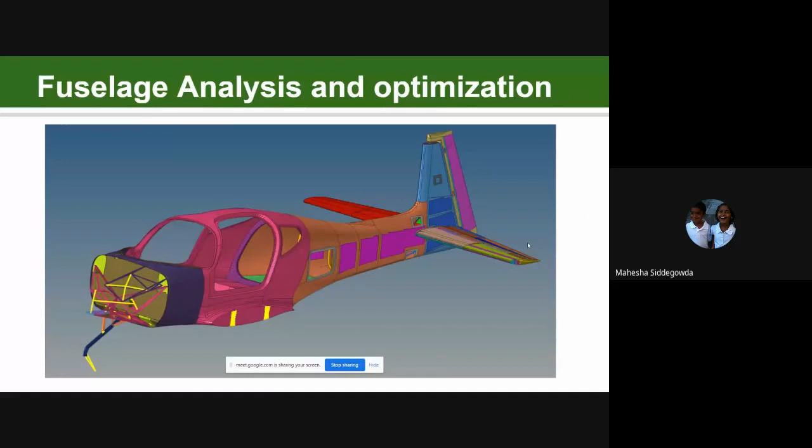Okay, fine, so I'll quickly show. This was the old aircraft I was talking about, and this is the new aircraft. This is not a vertical takeoff and landing, this is a fixed wing regular aircraft. This design is the vertical takeoff and landing aircraft. I was responsible mainly for the wing and the landing gears for this project, structural analysis, and supporting them with weight optimization.

So this is the actual prototype that we built, and we did the testing. I was also responsible for the electric motors. This is an electric aircraft, by the way.

There is a unique advantage of electric vehicles when you want to take off vertically and land, because your motor also works as a control surface. So you don't need a new control surface, you can use the motors itself for maneuvering. So this is the design for the electric aircraft, with the electric motor embedded in the propeller itself.

So this flew successfully in early 2015, and we did a lot of engineering work for this. This was probably the first electric aircraft that took off vertically, landed, and did all the testing successfully. This was done in California, Bay Area.

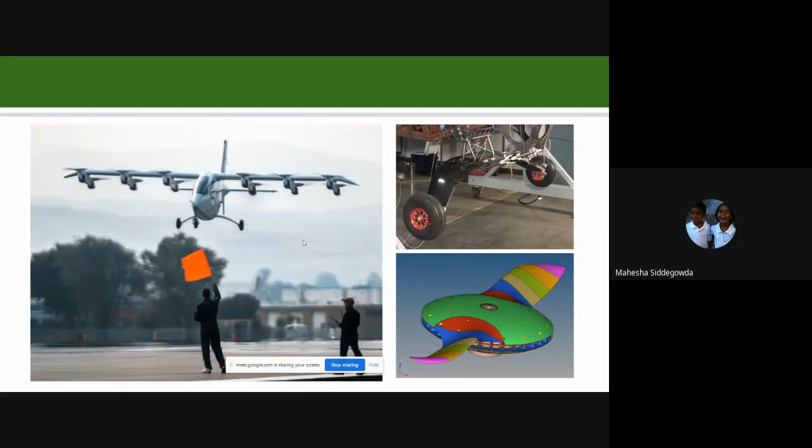This is the actual aircraft that was finally built and test flown. So you can see it flying. This is the main landing gear, and this is the test setup. I have a couple of pictures of this.

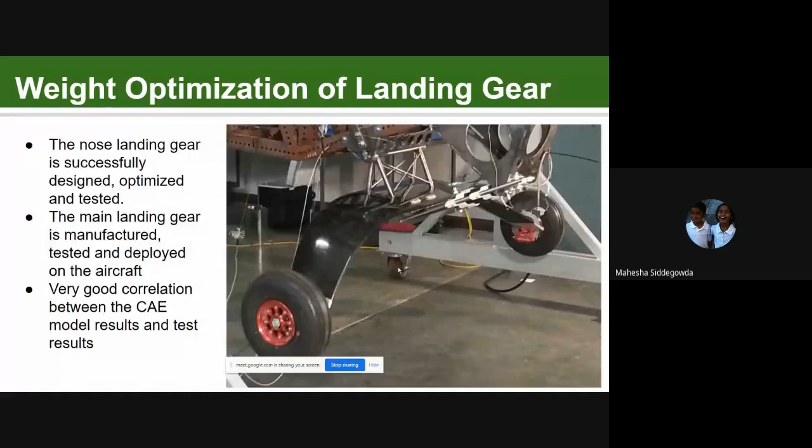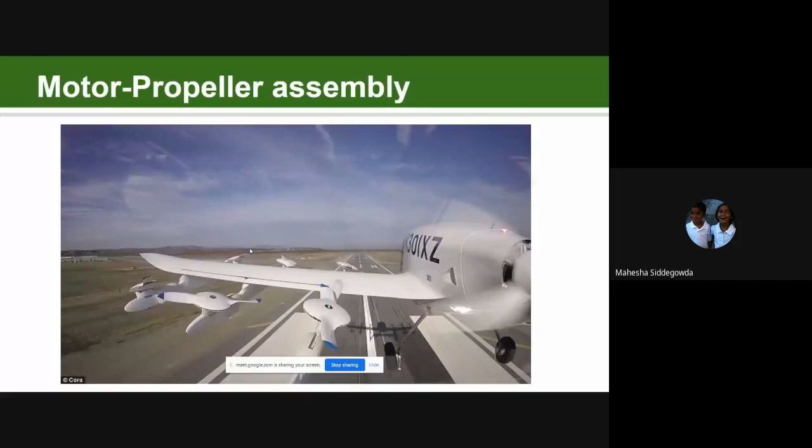This is the front nose landing gear. Again, everything was optimized, and this is the wing design. This is another view of the wing.

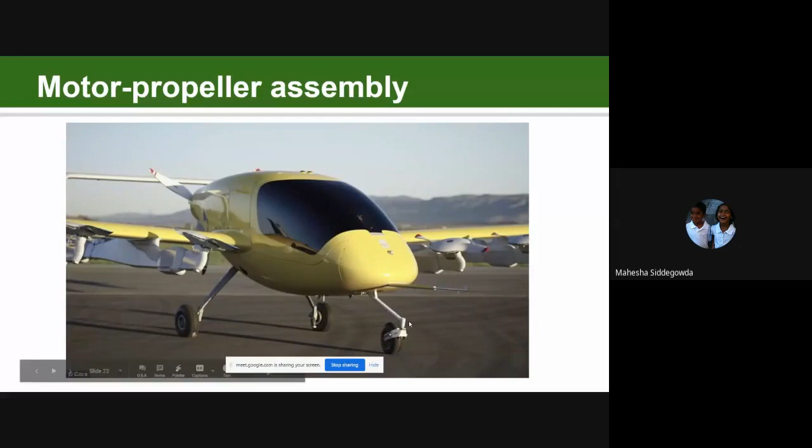This is the second generation aircraft, the same aircraft, but with some design changes. So you can see the propeller embedded, electric motor embedded propellers here. This is the CAD model for that, and this is how it looks inside.

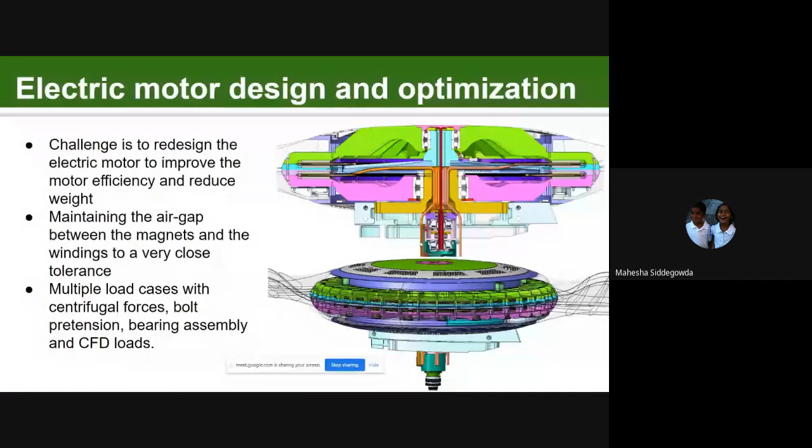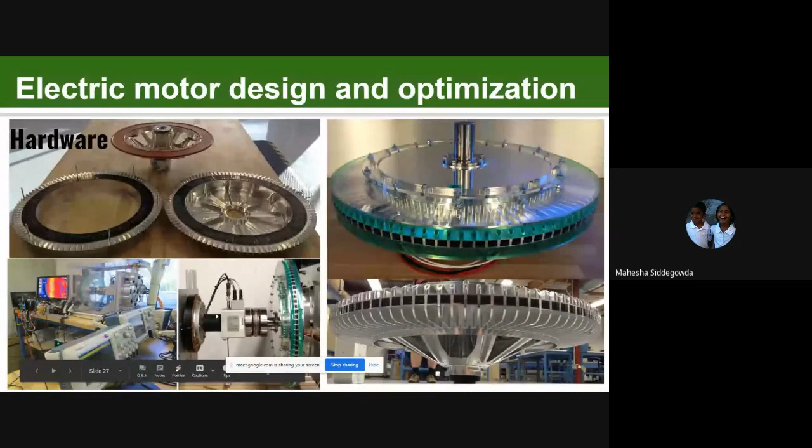This is an electric motor with the whole assembly. And then this is the actual motor that was built, and we also tested that. In the lab, it was tested to make sure the performance and weight and all other aspects are met.

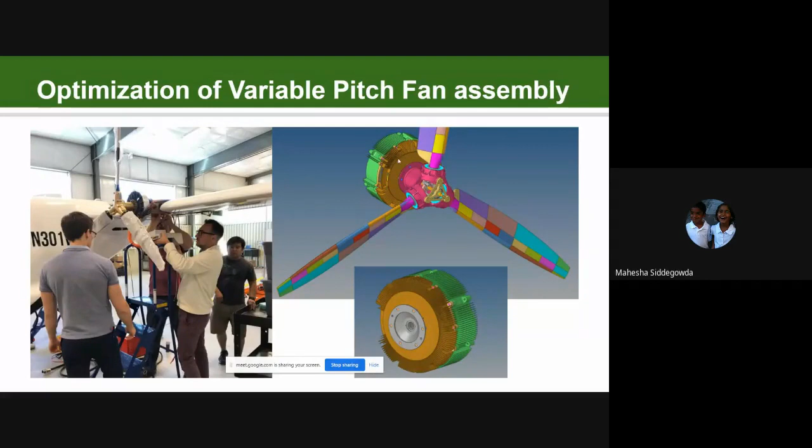So that was one of the projects, and this is another project where I worked on. In this, I'm showing the propeller, which has a variable pitch propeller, again with an electric motor in the back. And we also did the testing of the propellers at the test lab.

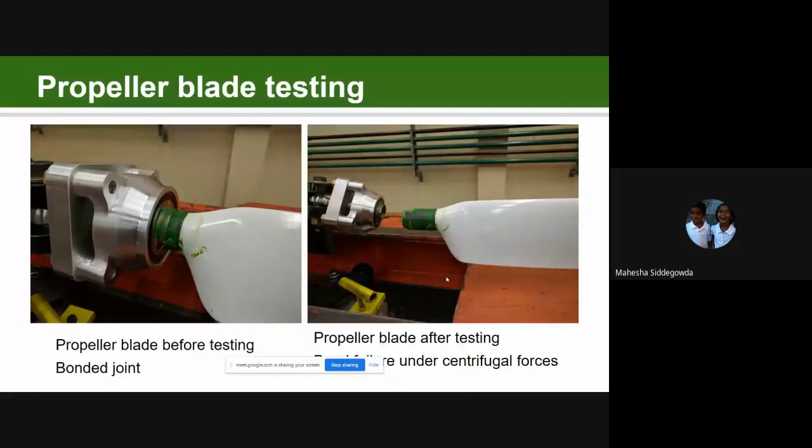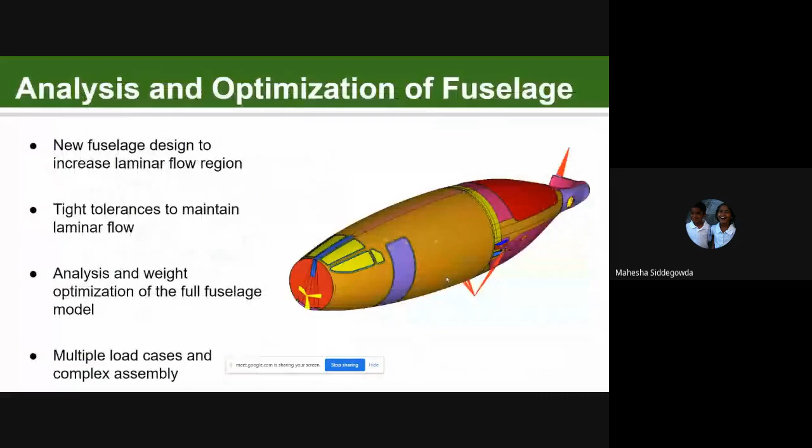So in 2012, I was a consultant for Adidas. We designed a new shoe sole for sprinters, 100-meter and 200-meter sprinters. This was worn by all the Adidas sponsored sprinters.

Unfortunately, Usain Bolt is really fast. It doesn't matter which shoe he wears, he won the race because he's a miracle runner. He was wearing Puma, but our guys also did pretty well in the race. I think they came third. One of the guys came third in this.

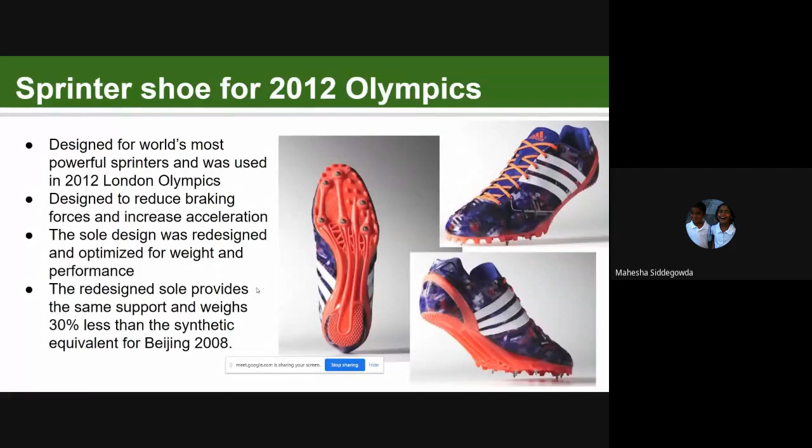Again, there was a lot of engineering work that went behind this sole design. What you see is like a pattern, but it's not a pattern that somebody sketched. There is a lot of engineering work behind all this design and the structure. What I'm trying to show is how we can use engineering and actually make a huge difference in real life.

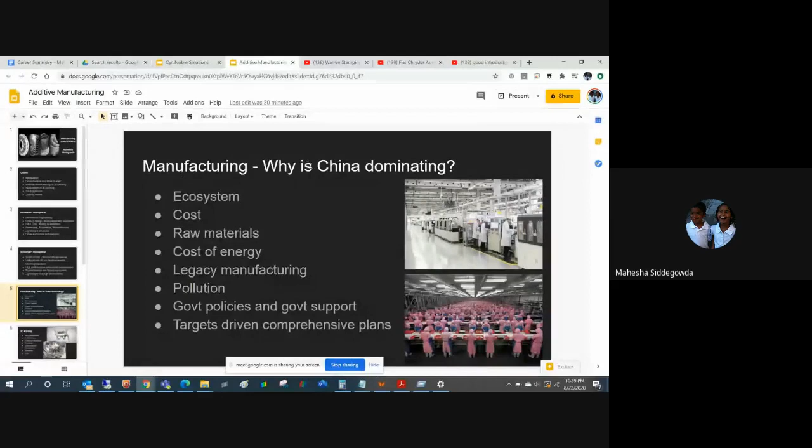I'm back to my main presentation today. COVID has created this opportunity for countries and companies to think about where they are sourcing their products, how they are manufacturing, and what they can do going forward. Especially in the US, there is a big push to bring manufacturing back to America, because right now maybe 70-80% of manufacturing is done outside, and much of this is coming from China.

First, let's understand why China is dominating, and we can then compare where they have advantage, where they can change, how this can be shifted out of China for various reasons. There is no politics in this, I don't believe in that, but there are reasons why it has to be shifted out, which would naturally happen.

One is the biggest, even though we think China manufacturing is cheap, it is not cheap for no reason. It's not like somebody is taking a loss. They are making a profit too. It is cheap because they have set up a huge manufacturing ecosystem.

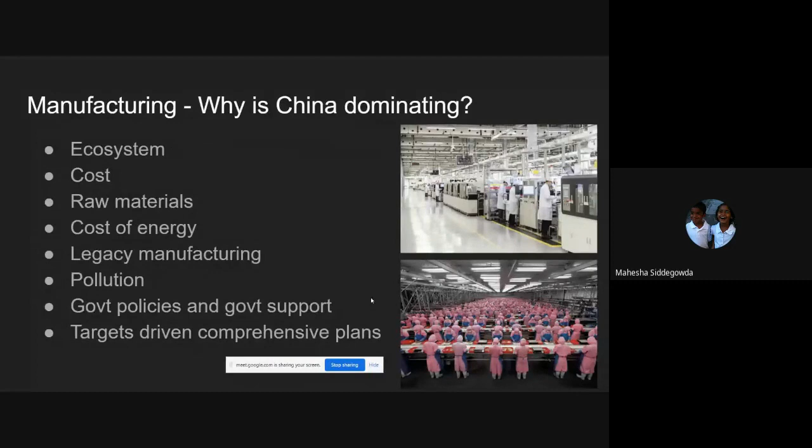So for most parts, you can change the game by just adapting to a new technology. This is where a lot of opportunity exists - to not copy what China is doing, not copy how much money they've invested and trash the whole ecology, but to be smart and leap forward to adapt a new technology. You can negate all the negatives in an existing system and start with a new, cleaner, less expensive technology which gives you an advantage.

So what this does is it takes a powder. I'm only focusing on metallic, but there's plastic, ceramics, and you name it. Everything nowadays is thought of as 'how can I 3D print this?' But I will only talk about automotive and aerospace related applications, since that's the field I work in.

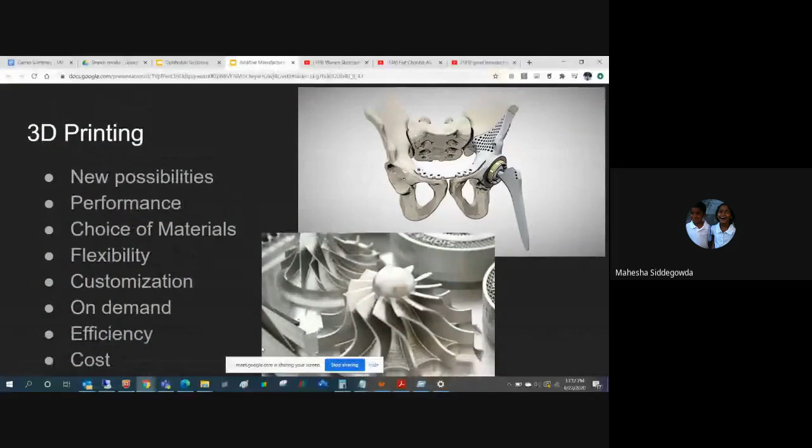And it also provides flexibility of manufacturing. For example, let me show you - I have one video. One second, I think I have to exit here. Okay, are you able to see the video I'm playing?

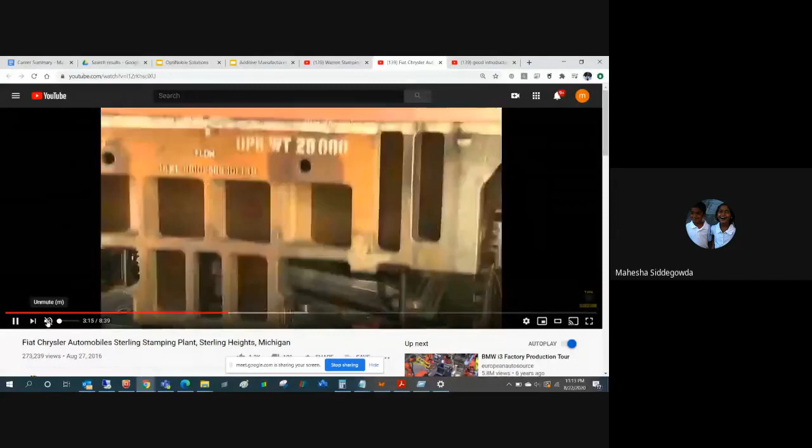Yes sir, it's visible. Okay, so what I'm showing you is a stamping unit for stamping a car side panel.

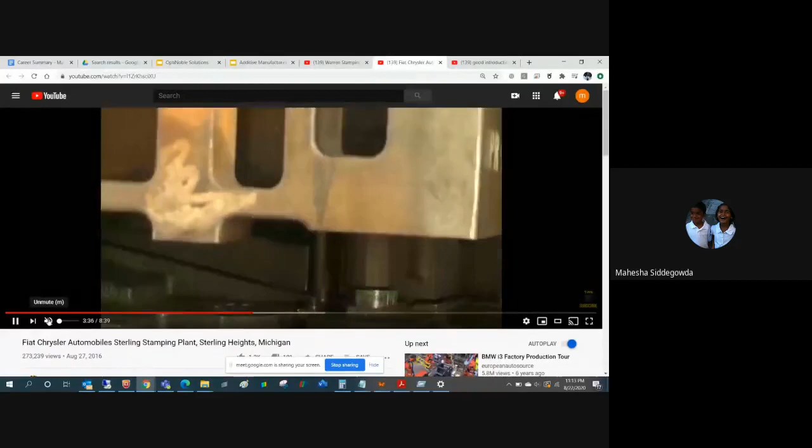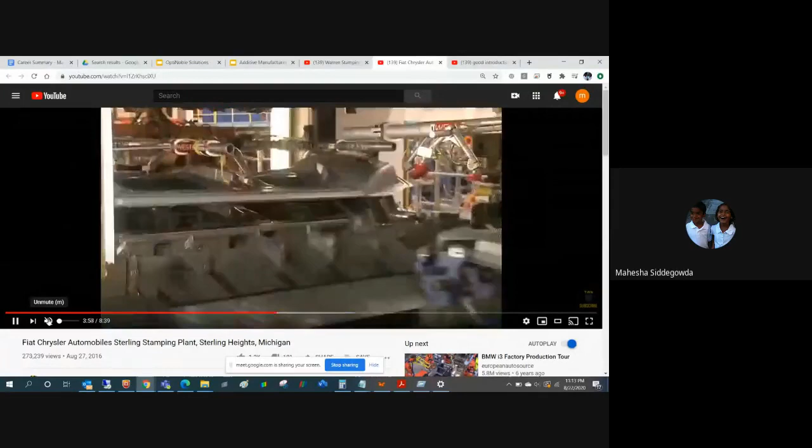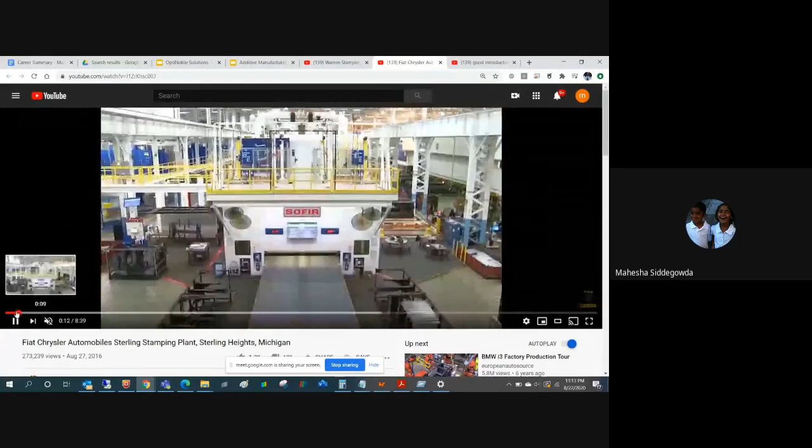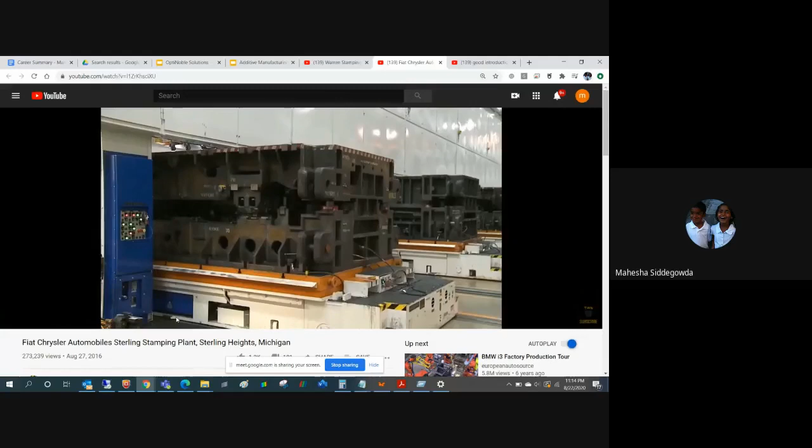So you can see this progressively getting stamped in a die, then it gets trimmed and so on. It goes through several stations before one car side panel is ready. For that to happen, let me show you - this is the kind of huge factory that you need. You can imagine the size of the factory and the toolings. This is just for one part I'm showing you, but there are hundreds of such parts required for a car body panel.

So you can see all these progressive stations - it gets stamped in one station, then goes to the second station, third, fourth, and so on. You can imagine how much money goes into building this factory, how much money you have to spend on building these tools - millions and millions of dollars.

But if the car didn't succeed, if people didn't like it, they have to discontinue it. All the investment made to build these huge dies, all the millions of dollars spent on building the tool itself, is all gone to waste. There's a huge loss associated with it. Not only that, just to have one car prototype built, you need to spend months or years on tooling before you can produce a part.

And if the part doesn't come out well, if it has problems with it, quality issues, folding, tearing off and whatnot, then you have to go back and redo your tooling and readjust and so on. So this puts you not only at a very big investment disadvantage, it's also time that you have to invest.

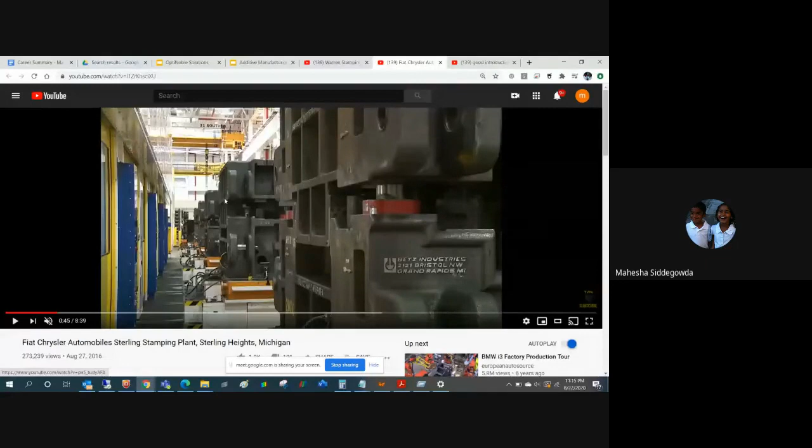You have to plan ahead, maybe years in advance. Car projects typically take 4 years, from concept to actually releasing it's a 4-year cycle. Some companies have shrunk it to maybe 3 or 2.5, but still it's a lot of time, a lot of money spent. And you can imagine just for one part how much effort or resources go in.

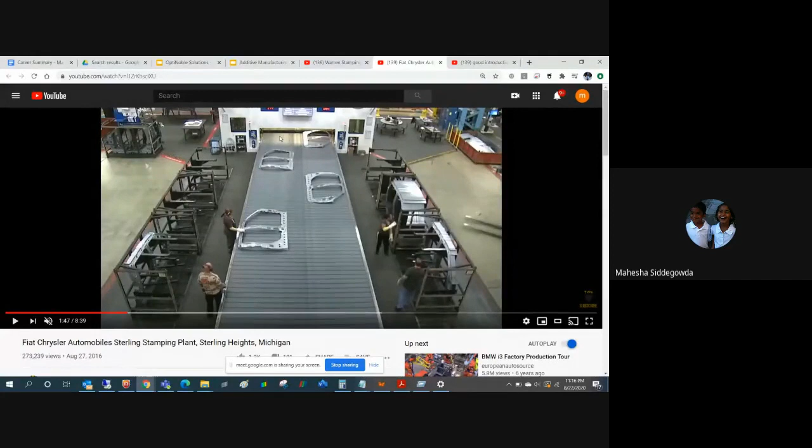So what I'm trying to show is only companies which can invest in this kind of infrastructure can do this job. But as you saw, this facility is only meant for building car panels. It cannot produce anything else. If you want to produce something else tomorrow, you have to tear down everything, retool, and invest a lot of time, money, tooling, and so on. So typically no company does that. They keep producing the same panels over and over again. You can almost think of it like a rigid infrastructure which can only do what it is supposed to do.

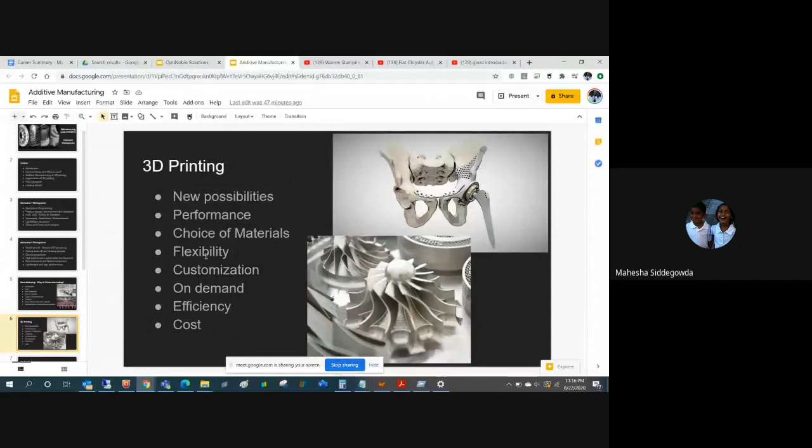But in case of additive manufacturing, what happens is you have this flexibility. You can just print one part, you can print 10 parts. You can change in between. It's basically like printing. You have a printer at home, you can pretty much print whatever you want, it will print on a sheet of paper. It's exactly like this. Whatever command you give to print, it will print. So that flexibility is there.

During COVID, a lot of companies which were involved in 3D printing, all of a sudden their regular production was not required because people were not going out, businesses had shut down and so on. But medical equipment became a huge demand. So all of them just stopped whatever they were printing or producing, and shifted to whatever was the emergency production. This kind of flexibility inherently comes with this technology now.

And you can also customize what you want. For example, if you're printing any biomedical implant, everything can be customized for you as a patient, and it can be very unique in design, structure, weight, and so on. This is a huge advantage when you have to produce one-off products, which you cannot even think of in other kinds of manufacturing setups. And you can change your response based on demand.

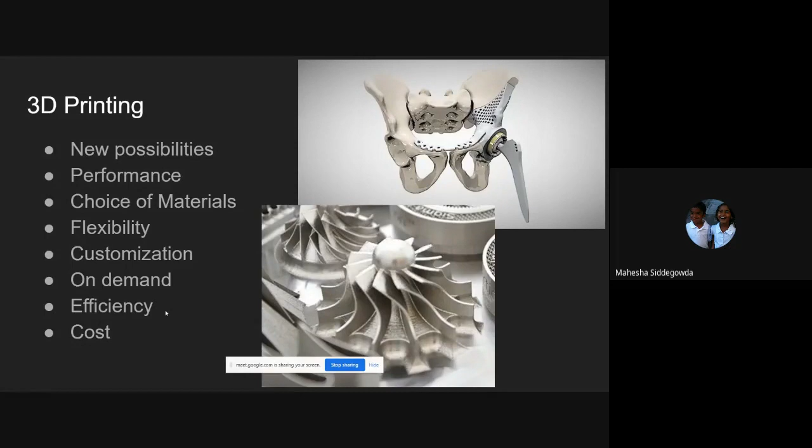There is also a lot of efficiency and cost advantage that 3D printing provides compared to a traditional manufacturing setup. As I said, the key advantage is you completely eliminate tooling cost, and you eliminate the time required to first make the tools, then tryouts, then rectifying all the errors you get in your product, reworking the tooling, and so on. All that is completely eliminated, and you don't need huge infrastructure, huge plants, huge machineries, trained skilled manpower, and so on. You also don't really need any ecosystem.

So typically, when I say ecosystem, even though there is one company that manufactures a final product, it was cast in some other factory, machined in some other factory, post-processed in some other factory, and then maybe given a final shape in some other factory, and so on. So it goes through so many different factories or systems that can all be completely eliminated with a 3D printed part.

Right now the cost is quite high, but it's coming down very fast, and it will become competitive in coming years. This is guaranteed. Right now the cost key drivers for adopting this technology are the cost of the machine itself, and then the material cost, which is the powder cost, and simply the cost of adaptation is quite high.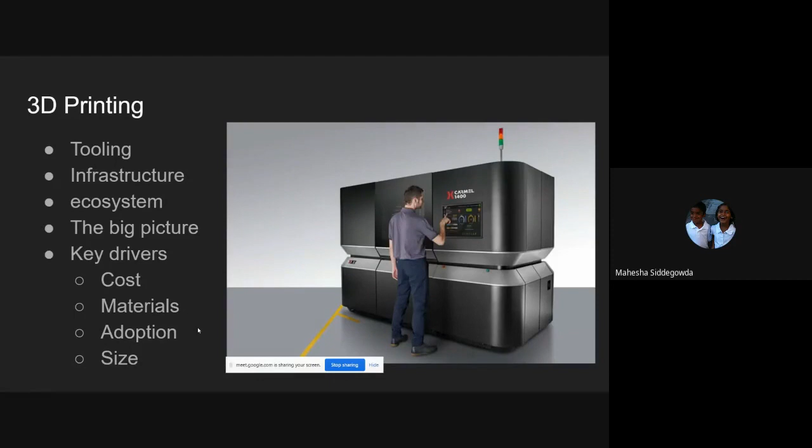So what are the applications? Why in the context of China did I mention this? The reason I'm mentioning 3D printing as a new manufacturing opportunity is we don't need to have such a huge infrastructure, huge ecosystem, factories, and so on. This can be turned around, and a small printer in a small shop can actually do the same job that the big factory is doing, and that's where the opportunity lies.

So we can bring some of this manufacturing back, say to US or to India, or whichever country is considering it, and they can start with this, and they don't have to go for the old big factory type of technology, but they can go with this nimble 3D printing, and first look at what are the parts they can produce with this 3D printing. So that's an opportunity for countries now.

What are the typical applications, the low hanging fruit so to speak, for 3D printing? One is definitely product development and validation. As I mentioned, when we build new products, there is a lot of trial, a lot of iterative design, back and forth, testing and validation, and new design iteration that has to happen. All that can be very efficiently executed with 3D printed parts.

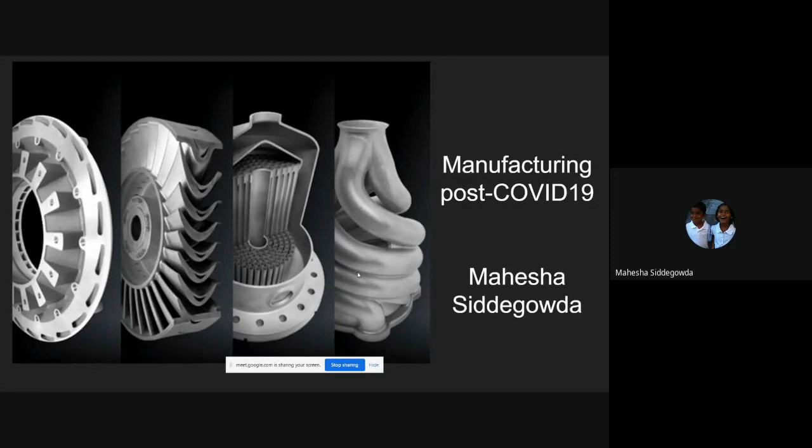Same thing, maybe this is like an example of a heat transfer unit. Again, this is all printed as one unit, and it will really shrink the size. Not only shrink the size, it's just one part instead of 100 different parts welded or assembled together. This is again another manifold and so on. So from the perspective of performance and lightweight, this is an amazing solution or amazing technology that we are now adopting in our design.

This is another big factor why people are pushing for 3D printing - the aesthetics. The kind of three-dimensional surfaces that you can print is phenomenal. There is no other technology that even comes close. For really high-end products, this becomes really, really important, and designers are taking advantage of this feature, building amazing designs and products.

With respect to product life cycle, this is very important in my opinion.

What's happening is, if you have a motorbike, like my motorbike which is 30 years old, I don't even get any parts for it. So I'm always trying to keep two engines as spares, so that if something breaks, I have a part. But imagine hundreds and thousands of such vehicles going out of use because some part was not available because it's old.

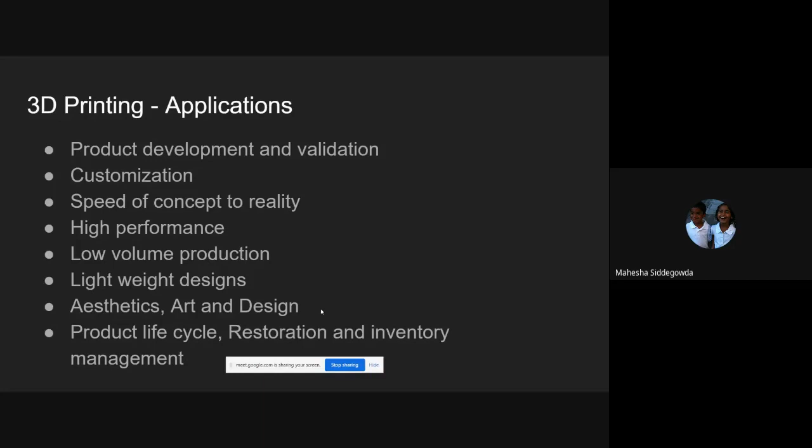Some of the advantages I want to touch upon: minimum wastage of material, really efficient that way. And whatever is not printed, you can recycle it and print it later. And you can really do just-in-time kind of operations.

Flexibility, I already explained. You can stop what you're printing for the next shift and then print a completely different thing. From automotive, you can go to aerospace, to biomedical, whatever the need demands, you can configure your printer to just print that. That flexibility to respond to demand is a huge advantage in manufacturing.

And infrastructure-wise, all you need is a small printer. So the cost of infrastructure is really low, which means setting up a factory, procuring the land, bulldozing it, and not all that. So pollution-wise, it's very well controlled. There isn't much pollution, and everything is contained. When compared to casting foundries, this is almost zero pollution.

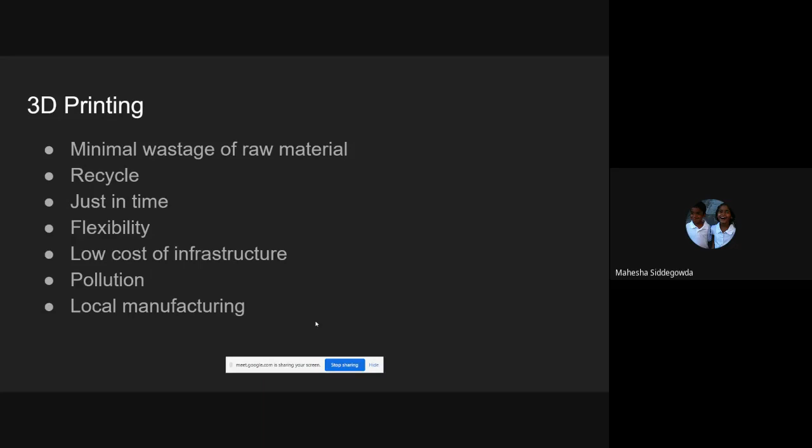And also it enables local manufacturing, which means we bring as much as possible locally, and don't have to ship a part across the world, like from China to United States or India. Everything can be locally manufactured.

With respect to the opportunities coming up with 3D printing, one is it's a new technology. It brings a lot of advantages on its own, as I touched upon in my previous slides. Just to take advantage of those, like shrinking your parts, making them lightweight, creating high performance products, and product development with quick iterations, that itself is a big opportunity for companies.

And in future, how do we increase the production rate? Right now, this is one of the bottlenecks for 3D printing - the printing time is slow. So people are trying to find new ways to print at a higher throughput, and that's one of the opportunities. If some researchers want to do research in this area, this is a big opportunity - if you can find ways to increase the printing rate, huge opportunity.

And of course, lowering cost is always an opportunity for any type of application. This is again - new alloy development is another big opportunity if somebody is interested. There are all kinds of materials, right? Not everything is 3D printed right now, but slowly people are finding ways to print these different alloys.

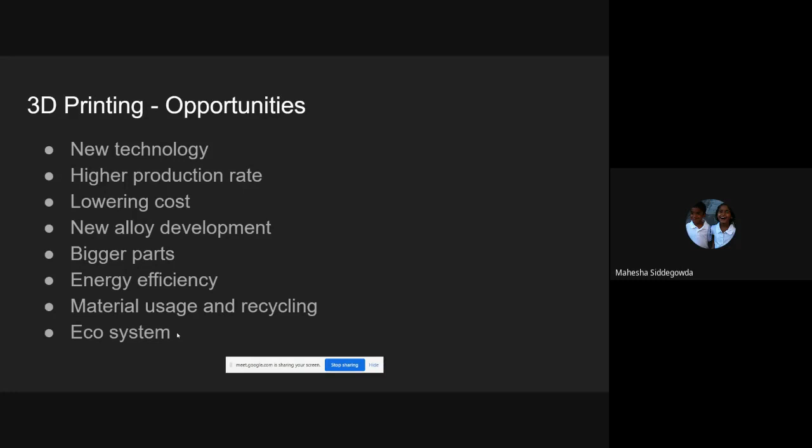For example, once 3D printing is done, it has to be post-processed. So there can be another opportunity for somebody to set up post-processing facilities - coating or painting, and assembly and so on. Right now we are getting everything from one place - everything comes as an assembled unit. But when we bring manufacturing locally, there are a lot of other associated steps that will also come and be placed around this 3D printing facility, and that builds an ecosystem in itself.